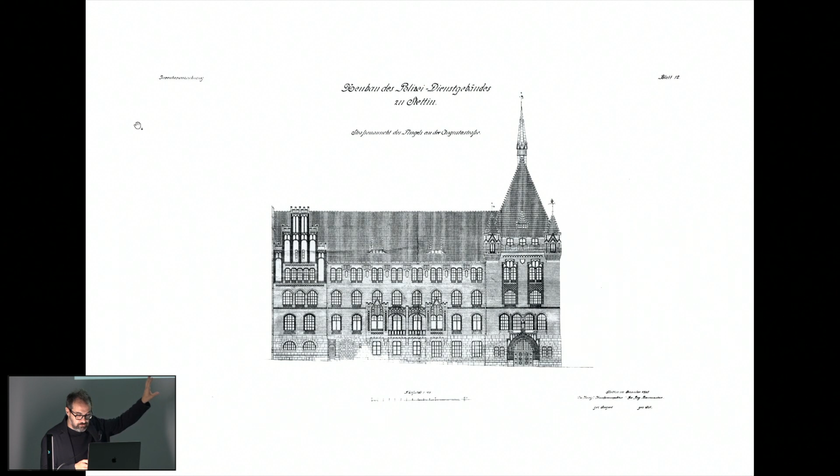In some way, what we like to do—the method or methodology we work with in many cases—is to work by analogies. We really like to work with what we have found, also by the circumstance or contingency of the different places. All these elements that already appear in this original architecture are passed through the filters of our personal obsessions, and are transformed and manipulated in a new project.

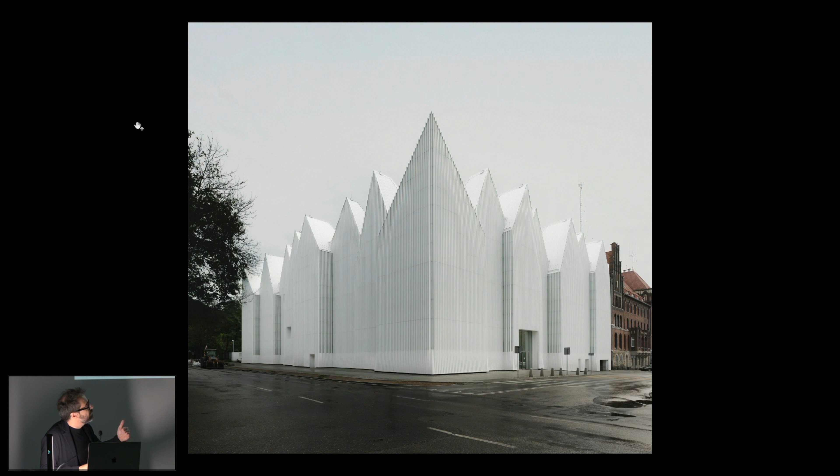This model of the Philharmony is made of the same ingredients that exist in some way in the context. We didn't have other elements, but we transformed what we found in a place. For us this is a way of explaining this idea of working in continuity with something. This is a building that wants to be part of a tradition that exists in this city. It still speaks about mass, verticality, roofs, pinnacles, the same elements that exist in the context, but filtered with another interpretation. All the elements that appear in this building are again here.

In order to give continuity to something, it is important that a gap exists in some way. Tradition doesn't move in a linear way, but it is necessary in order to make it continuous to create a gap, a new step in some way, an interpretation. This is what we have tried to do in this building.

A reality is not just a physical reality, but there are different realities in a place, and something maybe expressionist exists also in this building, relating it with a certain history of architecture that appears in that geography. But this relationship with tradition is not a nostalgic thing, not at all. We select, manipulate, and work with elements that we found, but without nostalgia. In fact we took certain elements and then modified in a very clear way the materiality of the new building.

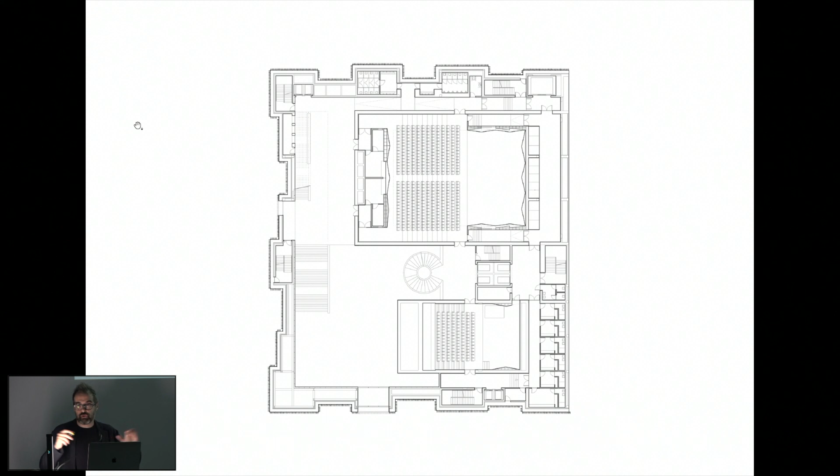We strived to solve the complexity of a program, of a context, in the most simple way. I think there is a moment in all projects in which just a few architectonic elements are able to solve the complexity, and this is the moment in which we found our way. The program of the Philharmony is solved by a crown that fulfills the site we have. This crown has all the technical elements, vertical connections, etc. It creates a kind of free space inside the building, which is really a new public space, and inside this crown float the two chambers - the symphonic hall and the hall for chamber music.

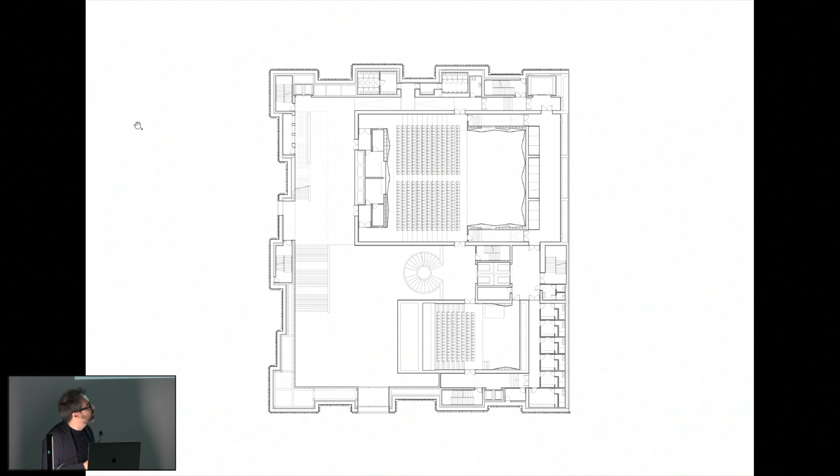I think all our projects started by reflecting on how to create public space. In many cases our architecture is just the frame of the public. In the other project I will present, you will understand this better. Here, in this project, we didn't have the opportunity to work with the urban space around the building. So what we tried was to manipulate the public area of the Philharmony - the foyer, the connections, the vertical connections - in order to create a kind of interior covered plaza.

In which you can host events and other activities. This space is a very simple space. It's just characterized by the vertical skylight that introduces light from the roof, the main connection that permits you to move around the entire building in a loop, and the verticality of the element. The rest is made in a very, very simple way.

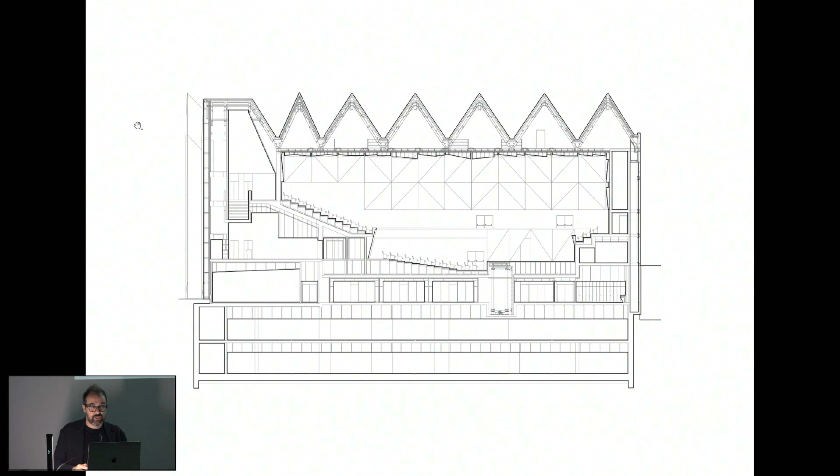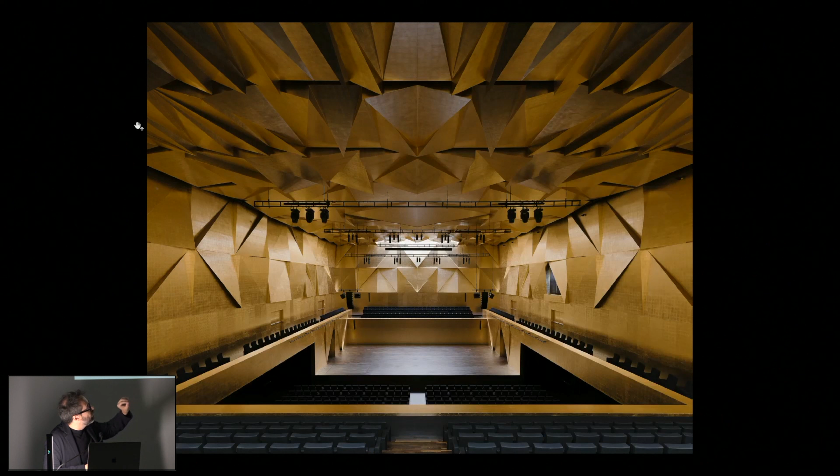What we thought is that probably starting with a detail, which is a very technical detail because it's made by different planes which are inclined in some way for very precise acoustical reasons. Starting with this element, we had the opportunity to build the entire symphonic hall. So the hall is a kind of ornamentation on a big scale, on a large scale.

This also alludes to or resonates with a certain tradition of historical concert halls from Eastern Europe. But what's interesting is that this large ornamentation, in reality, is a fantastic technical machine that permits achieving the best acoustics. And when an element which is ornament becomes a technical element, it's no more an ornament in some way, it's something different.

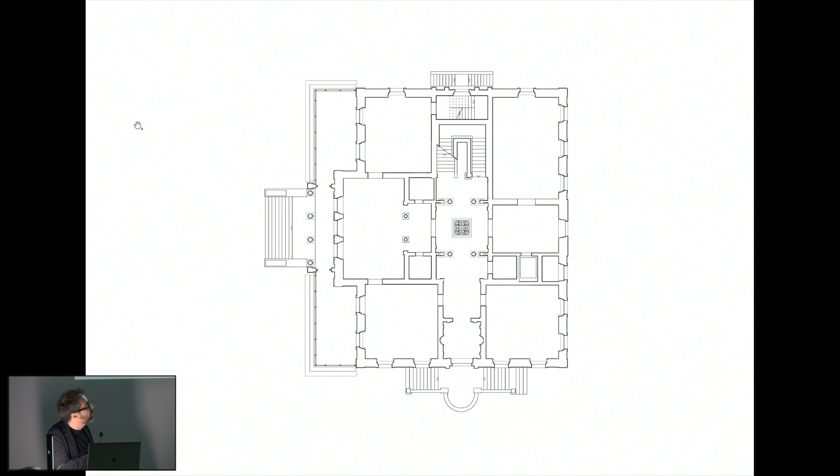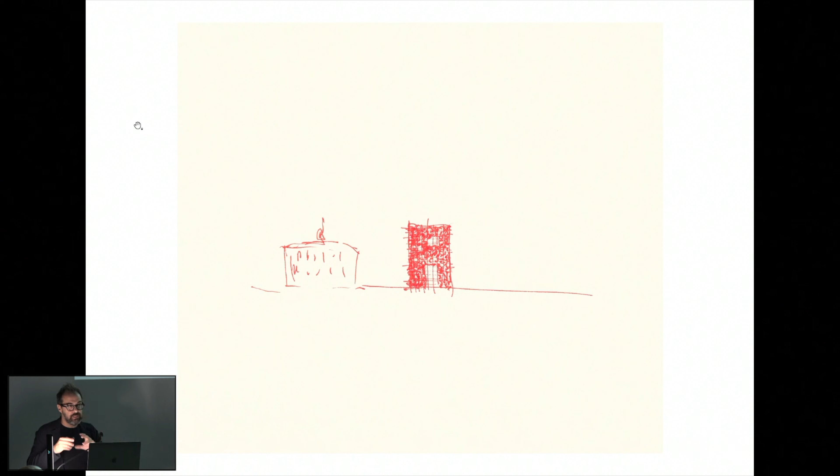When we started the project, this is the plan of the Villa Planta, the original building, clearly marked in a double symmetry. We started to think it was important to confront our proposal not only with this element, but with an ideal — the precedent of this building is La Rotonda by Palladio. So we started to understand the project as a diptych, reusing the same element of the pre-existing and transforming it into the new proposal.

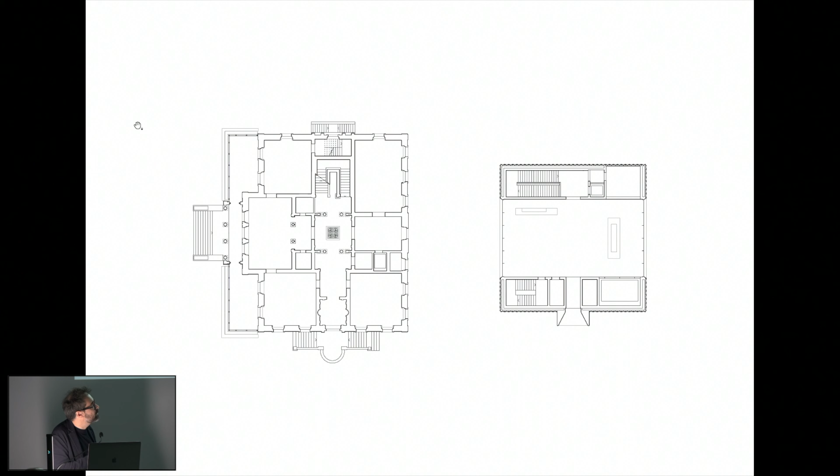What we've done is a very simple proposal. This extension works with the same element — a double symmetry. The geometry is extrapolated from the original. It's a very simple building composed of just two cores, one private and one public, containing a public space, this small foyer.

It's a neo-Palladian building with a kind of bas relief on the facade that resonates with the decoration of the historical building. It's an ambiguous element that works in continuity with what we had — very specific for this place, but at the same time very autonomous.

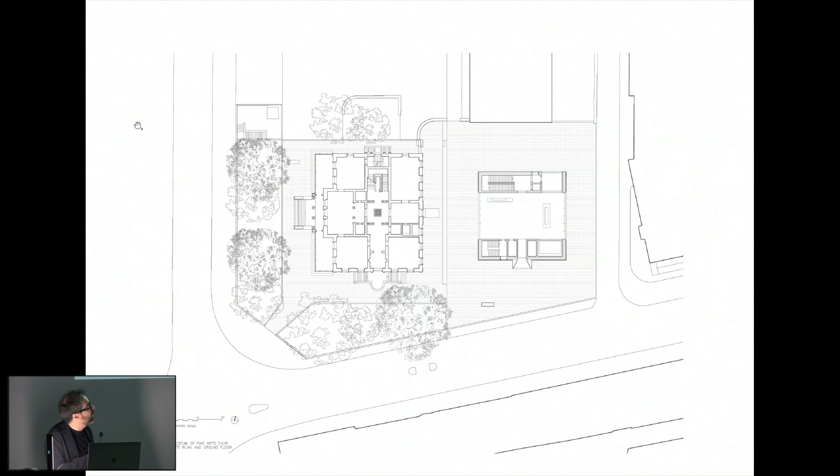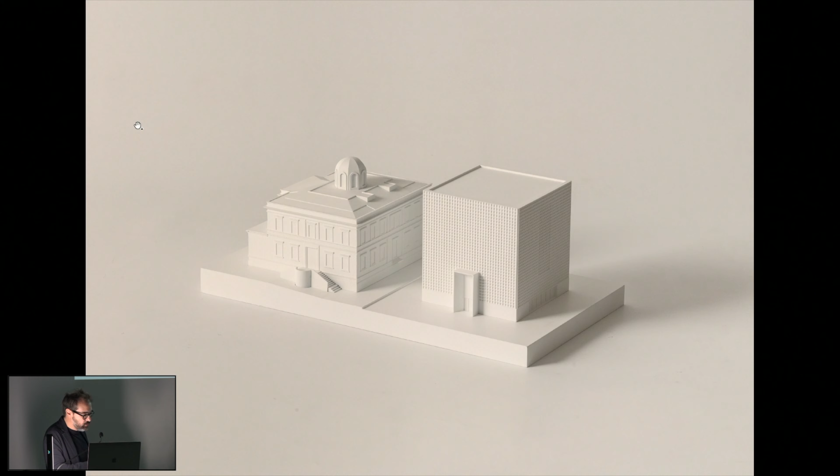What we've done to create this relationship between the two elements has been to reduce the footprint of the new building as much as possible, in order to have this kind of mineral garden or podium around the building, finding the perfect fit for the new building into the context. For us it was very important to understand that the two elements should create one precise unity. The space around here, which may not seem very important to you, has in reality been absolutely crucial for the project — it permits the building to breathe inside the context and have the right relationship with the historical building.

This may not be very evident here, unlike in other projects, but first we really try to organize the public space, and then the architecture is just the result of this strategy.

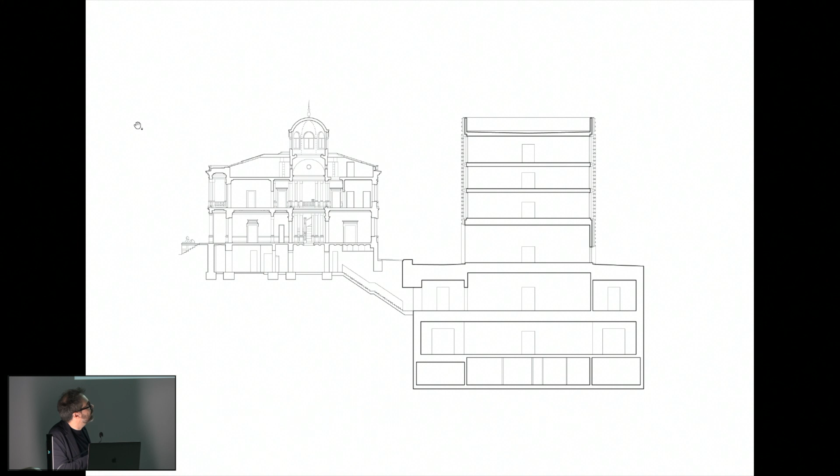In order to create this precise relationship with the historical building, we organized the program in a very radical way. We decided to put underground all the temporary gallery space, and keep above just the public space, then connect the building at the lower level, in the basement, without touching the historical building with any element. So the foyer declares the relationship with the historical building.

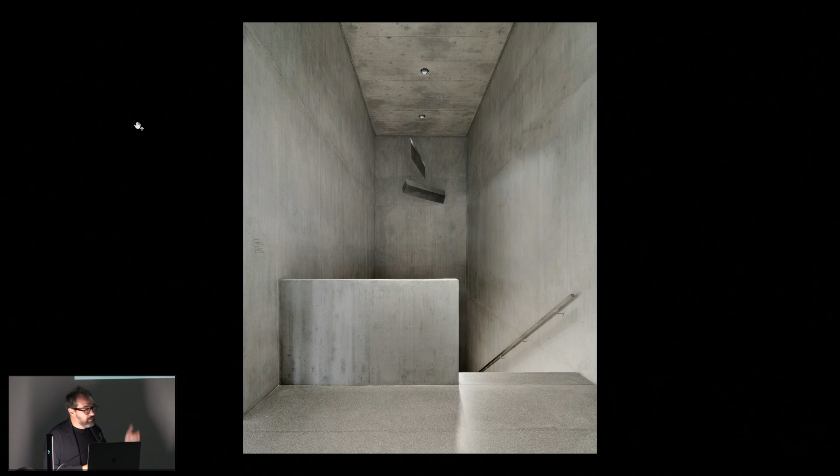From here there is a quite generous concrete stair that moves the visitor down. When you enter the gallery it's a very neutral space, but at level -1 you discover this Palladian influence very clearly. This plan, composed of a sequence of different, well-proportioned rooms, is exactly like a Palladian scheme in some way — a combinatory sequence of rooms.

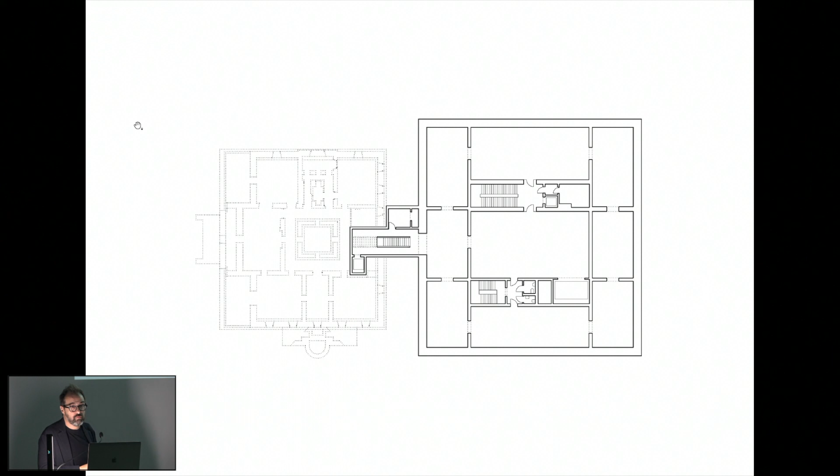The organization of this reminds us of the physical precedents here, but also of this ideal architecture in some way. So we are working in continuity with the physical reality, but also with the history of architecture.

The lower level shows this attempt we always make to reduce architecture to just what is necessary. We don't want to add any superfluous element. So here we have just the two cores and a wall that protects this space, and the rest is free space for temporary exhibitions that can be divided and modified as the curator wants.

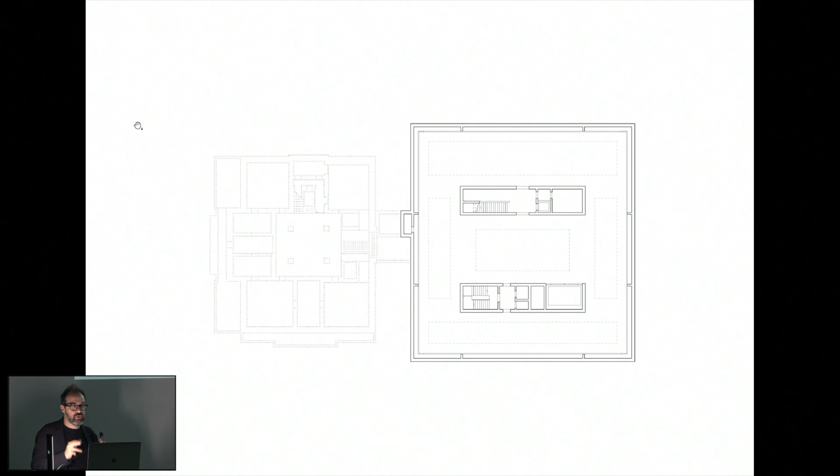As I said to the students before in my talk, I think we don't have a preferred material, but we understood the materiality of the projects as an element that can intensify an intimate relationship with the context, with the atmosphere of a place, with also the materiality of a place. So I think for this reason, every project has its own materiality in some way.

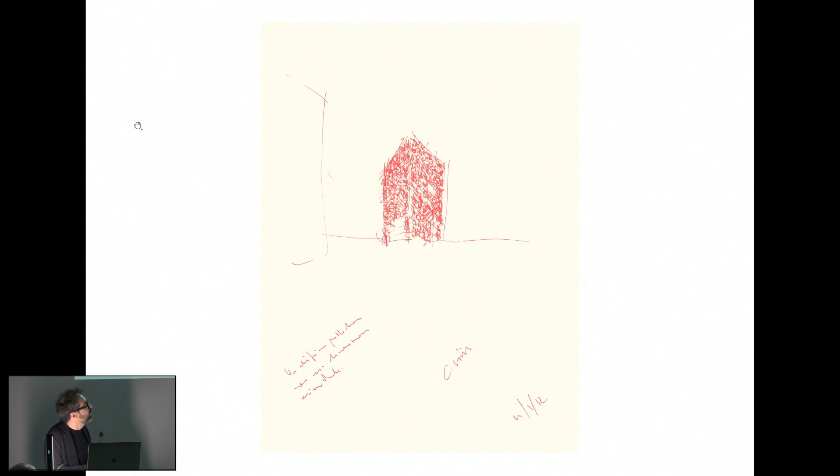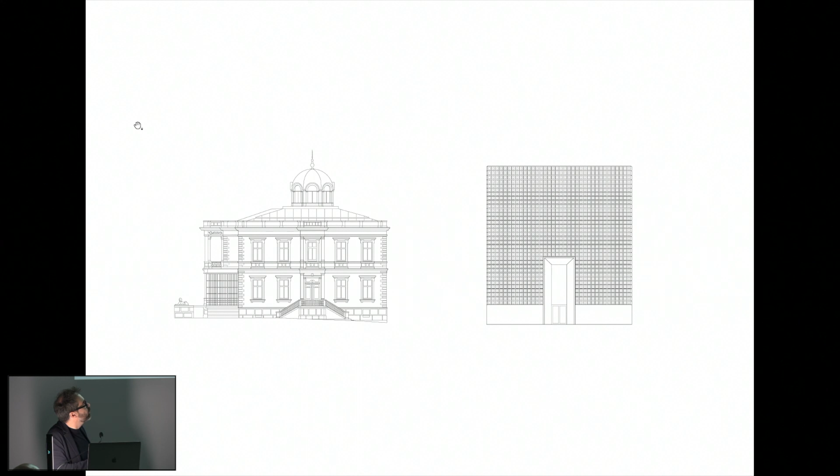In that case, the opportunity, or also we worked a lot with the facade of the building, because for us it was very important that this kind of filigrane or bas relief allude or resonate with the other ornamentation that exists inside of the historical building. And again, we worked with the specificity of this place. We were based here in Switzerland.

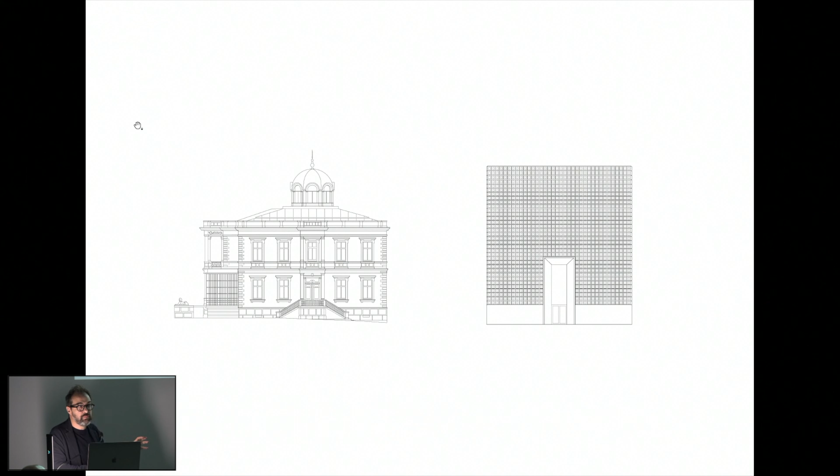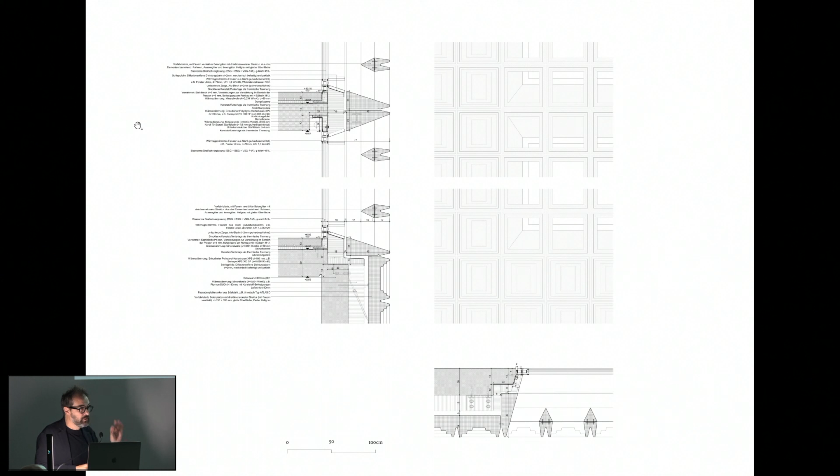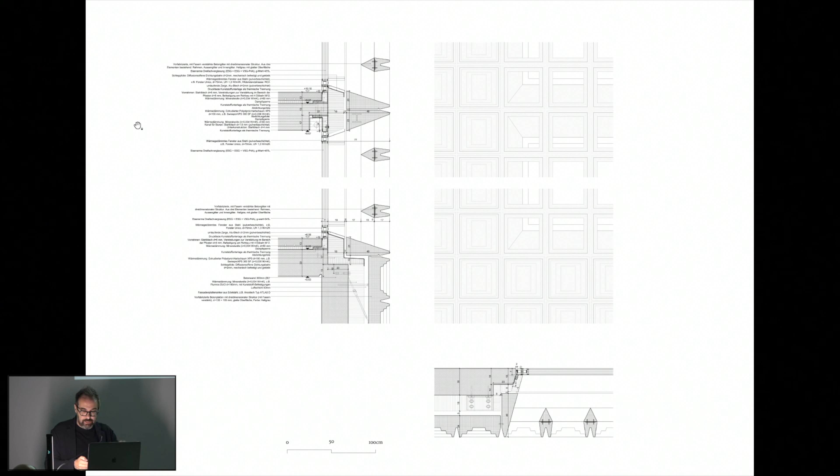They have a wonderful knowledge about how to work with concrete. So we were able to make the entire facade in prefab concrete with very big panels of concrete, in which we were able to have a very precise detail, less than 1 centimeter, in this element. But again, this element, every element of the project should have more meaning. This is not only a conceptual element, but it's also a very technical element that permits creating this filter from the light for the upper part, and also hiding all the technical elements.

Also, we continue to reinforce this idea of the detail also in the loading, the door for the loading dock, in which we carved the steel in the same way as the rest. There is a detail, but an important detail.

In order to reduce the footprint, what we proposed was also to use the foyer as a loading dock. And this is a kind of very radical decision because it's a way to find synergy between programs that apparently are completely opposite. But this also is an element that permits really then to liberate and create public space around the building.

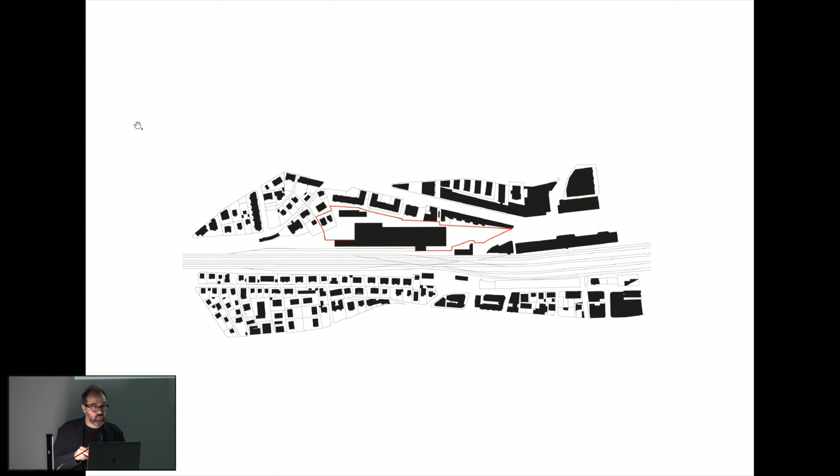So the project was about locating in this area not only the Fine Art Museum, but the three major museums of the city: the Museum of Design, Museum of Photography, and the Fine Art Museum. For many months, we really tried to see how to manipulate, reuse, transform all these historical elements. But at some point, when we looked at the diagram, there was the actual situation with the area fulfilled with this element. We started to think that for this project it wasn't enough to transform an element, but it was really important to define an urban strategy.

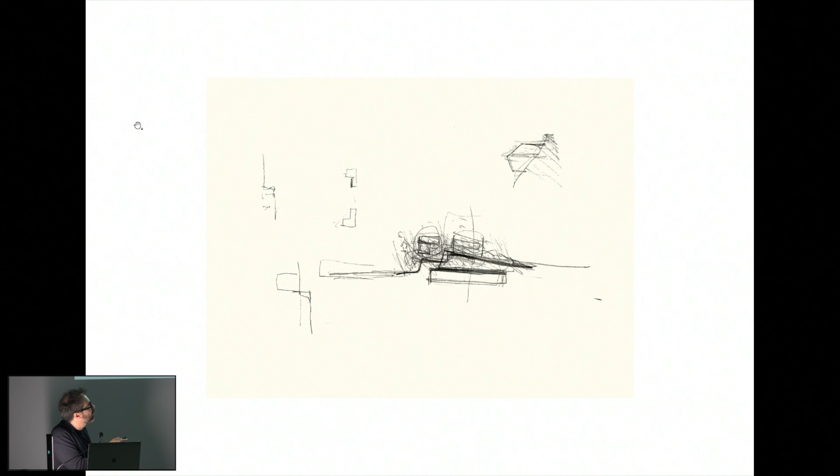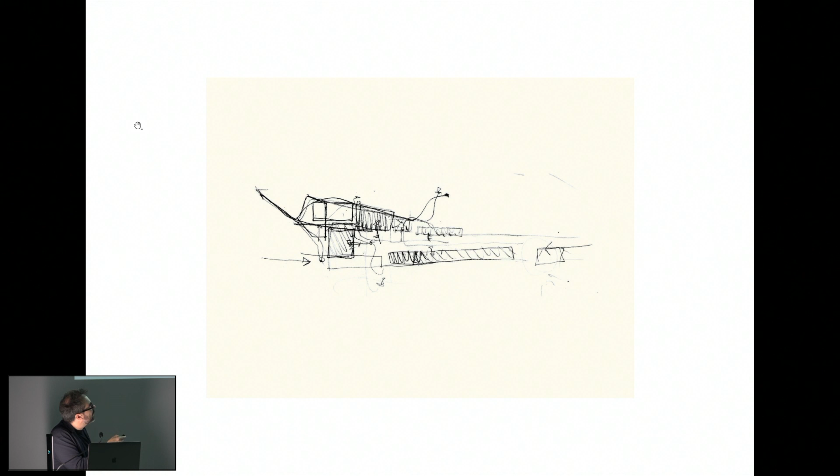This elongated esplanade could be linked with the plaza in front of the train station, and really organize the new quarter for art as a part of the city, and link this new quarter with the city.

And so we solved the project again in a very precise way. We just put the three elements. This is the Fine Art Museum and the other two museums. And at the core of the proposal, there is this long esplanade that links this area, which is actually a cul-de-sac, with the city center.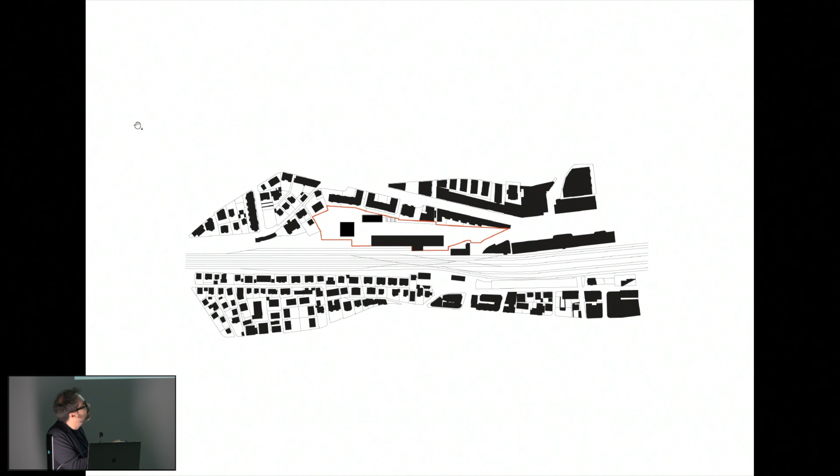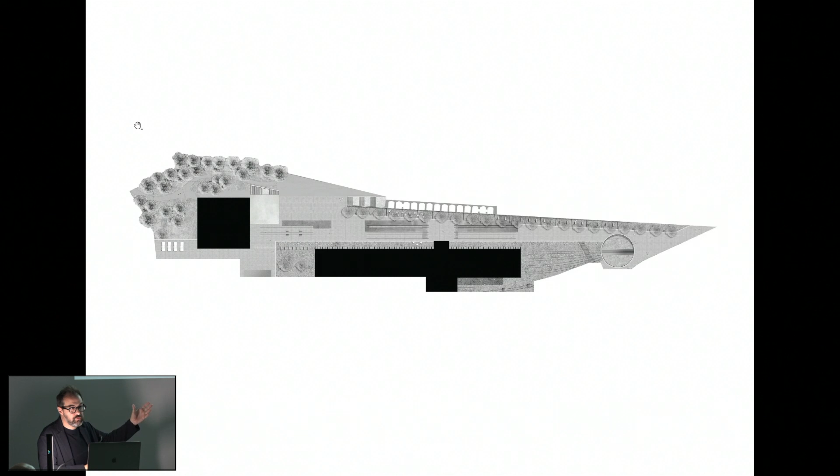In another step, a year later, during the construction and with a second competition, the two museums are being condensed into just one element, and this process of simplification of the place has been finalized. The core was the public space, and the building, the Fine Art Museum, arrived after this decision in a very easy way. We understood the museum as an elongated wall, as an inhabited wall, able to divide the new public space from the world of trains here.

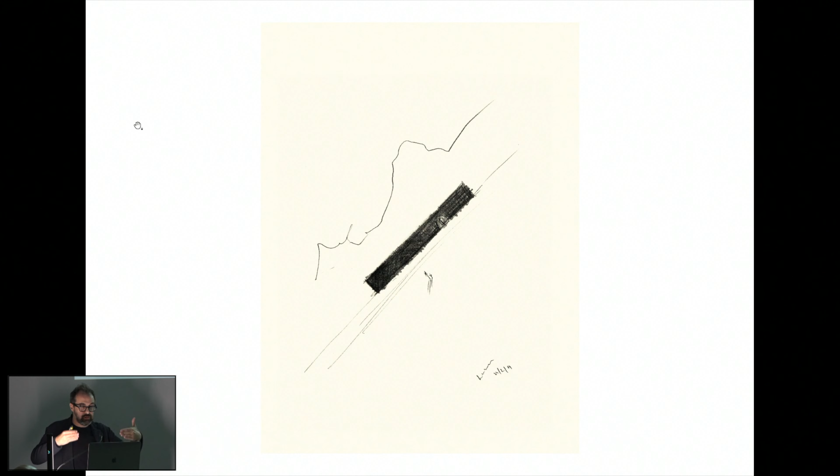So in these first sketches, you can notice how the building had just this wall that is confronted with the landscape of the mountain in the back. And the building, as I say, arrived very, very easily. Just this kind of sequence of elements that create this elongated wall, very porous and active towards the plaza on one side, and very opaque from the other part.

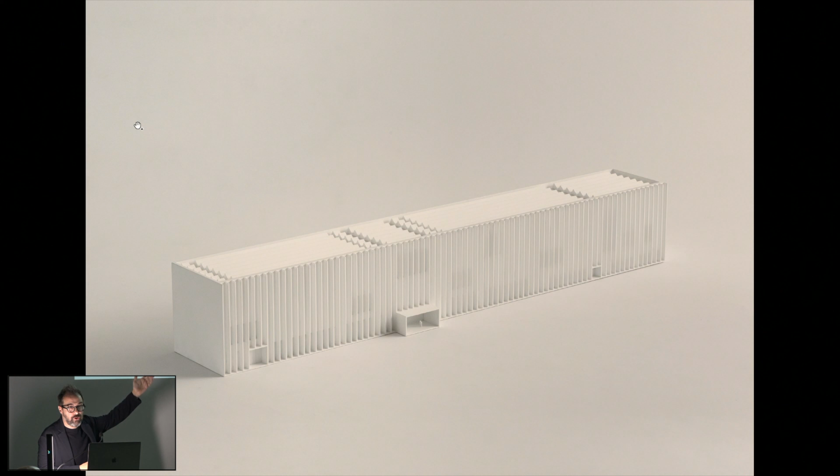But from the other part, you can notice also that the building starts to appear like an industrial element, like a big fabric in some way. And again, this was the attitude of the project: to be in line, in continuity with this kind of industrial atmosphere present in this area.

This area was essentially an artificial space platform in the middle of the city, very inclined, dedicated to maintenance, trains, etc. When you have the opportunity to make this kind of big urban transformation, you shouldn't lose the quality and character of this reality. So this is a building which resonates with the industrial condition present on this site, a building in the middle between contextualism and abstraction in some way.

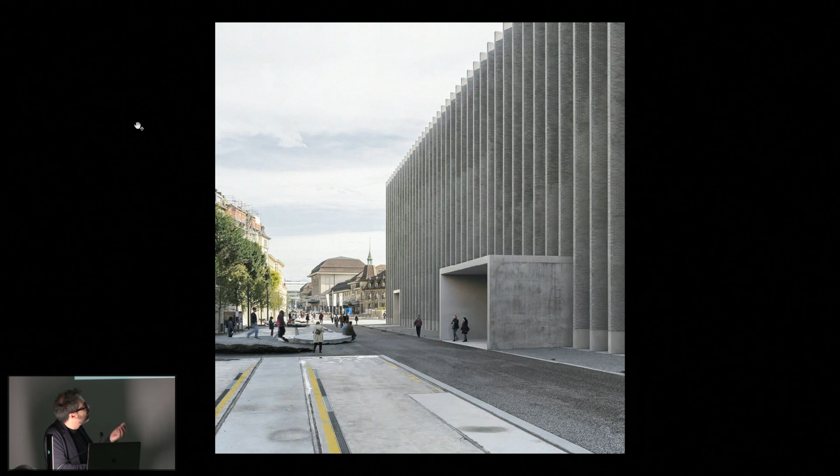From the other side, the preservation of the memory of the site passed to the preservation of the floors of the other building that conform the new public space. This building appears a little bit enigmatic - you can notice it's very closed, very opaque, very industrial, but the reality is that behind this vertical element, the facade is very open.

The ground floor, I think, is completely open in some way, and this permits understanding the interior of the building as an extension of the plaza inside the museum. So this small element is not a minor element but the crucial element, because it permits inserting the new foyer and starting the rhythm of the entire building.

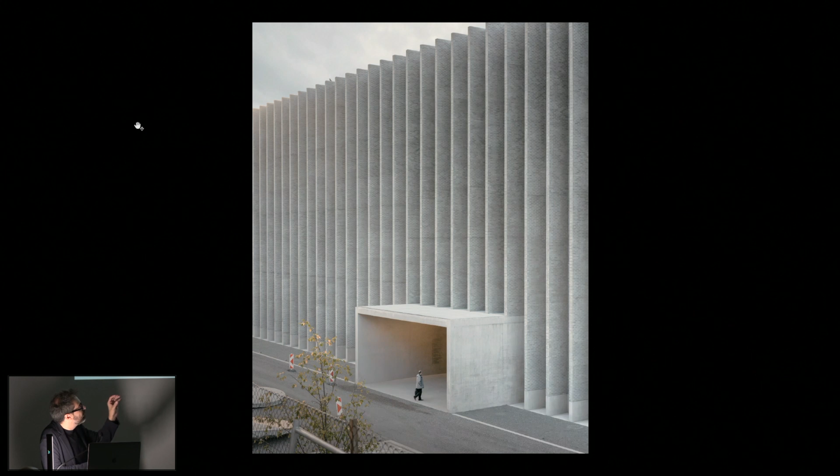We remark the entry into this sequence of vertical elements with this porch. When you enter here, you have to cross this compression, and then you arrive at the big foyer, illuminated with light from the roof, and the historical element. So the windows that I showed you before have been transformed into this new element.

Again, I think this is exactly a visual explanation of what I intend by working in continuity with a story, with our traditions. In order to perpetuate the tradition, it is necessary that there exists a gap in some way, an interstice. So this element really became the capital, the main compositive element of the new foyer.

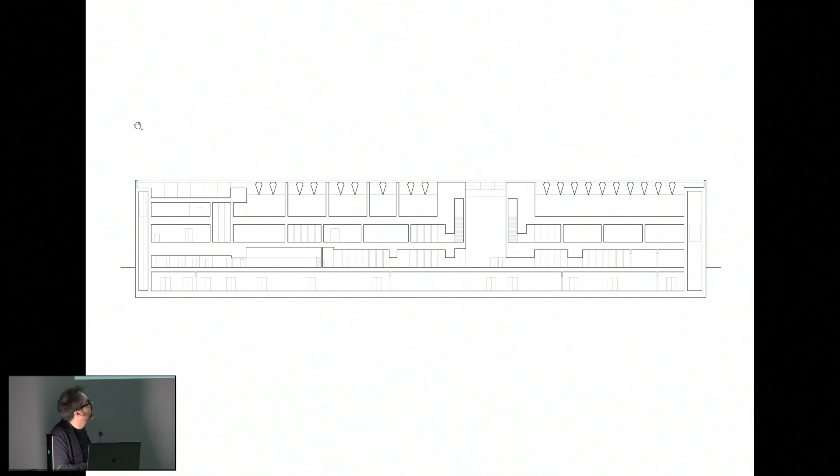Another view of this quite high space with the natural zenithal light. And then the building is very pragmatic: the foyer divides the building in two parts for temporary exhibition and permanent exhibition, and there is another cut in this small window that I showed you before.

Around the central foyer there are two stairs that bring you up, and this permits the building to be very flexible, because you can select where you want to move.

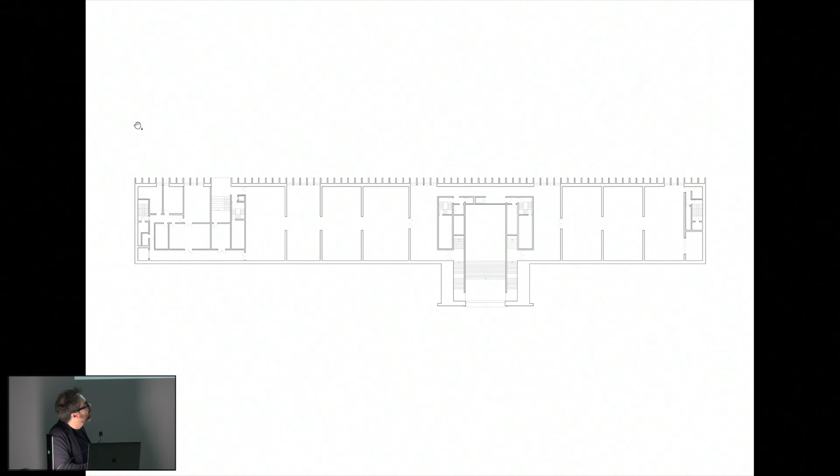This is the first floor, in which you start to understand the structure of the building. The public area has this kind of mineral materiality, and here you can start to see the function of this vertical line, which is essentially our brise soleil that filters the northern light into the building.

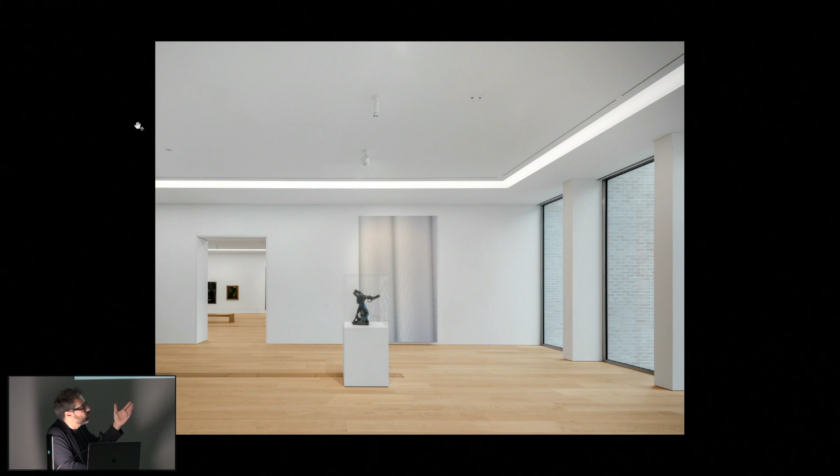Then you enter the gallery, in which we modified the materiality in order to permit presenting contemporary art, but also classical art. This is the reason why we worked with wood, and here you can see the windows on the right.

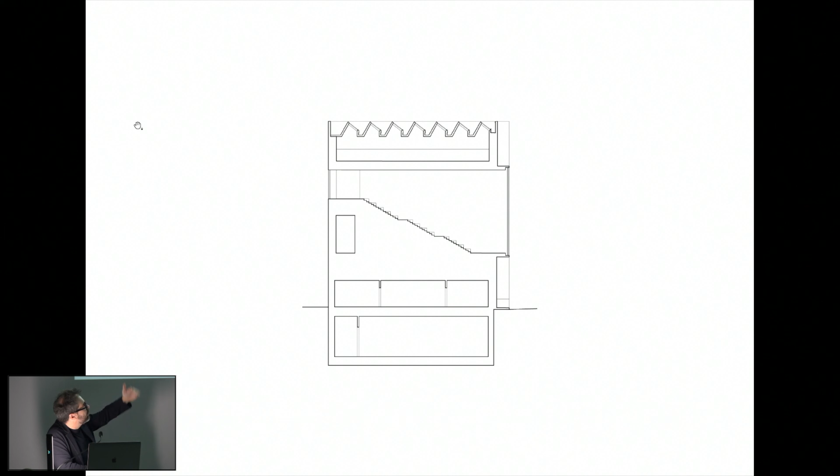On the other side there is another cut that permits establishing a relationship with the geography. This is the other element through which you can see outside. From one side, when you arrive here, you have a beautiful view towards the lake, and from the top you can see the new plaza of the Quartier of Art.

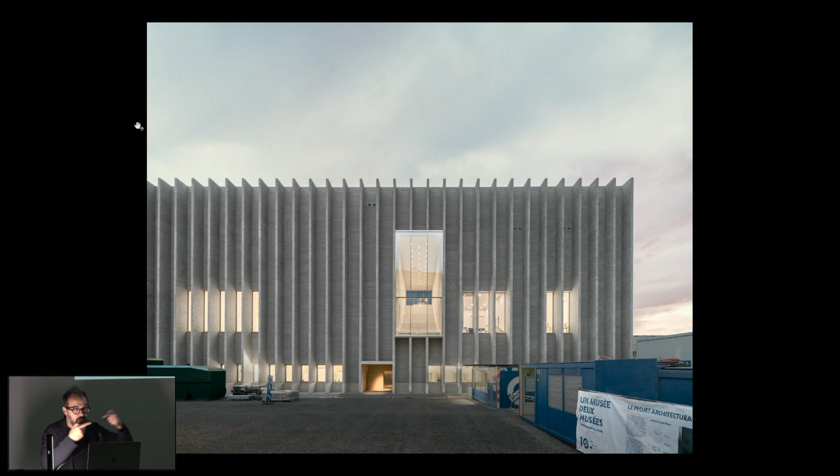This image was taken during the construction, so it's not finished. This element exactly is the only one that appears on the facade. The others are covered by this brise soleil, but this one, because it's a public element that establishes the relationship with the geography, is evident on the facade.

On the upper floor, again like in Chur, you can understand that this very big building is more than 150 meters long. It's solved with 5 cores that create the structure of the building but also divide the program.

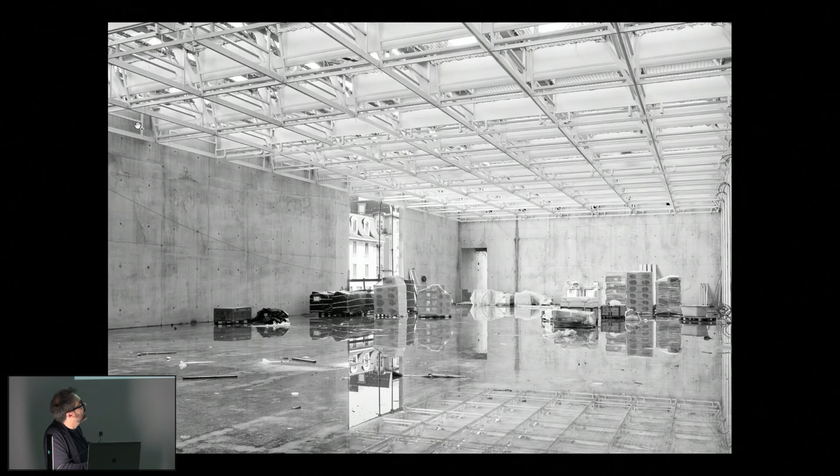The upper floor is characterized by the skylights, which create a main feature. This is a very sophisticated and technical element, but we have tried to solve it and present it in a very effortless way. It's like a ceiling floating above this huge exhibition gallery.

These are some other elements of this space. The entire building is made of brick in order to give this socle condition, and the windows are all in situ concrete, to give the project a kind of fabric condition, related to the other industrial buildings that were present on this site.

To conclude the presentation quickly, two recent projects we are doing now. One is the extension and transformation of a historical abbey in Belgium for a visual art museum. The place is located in Kortrijk, a small city very close to Lille, and this building is currently under construction.

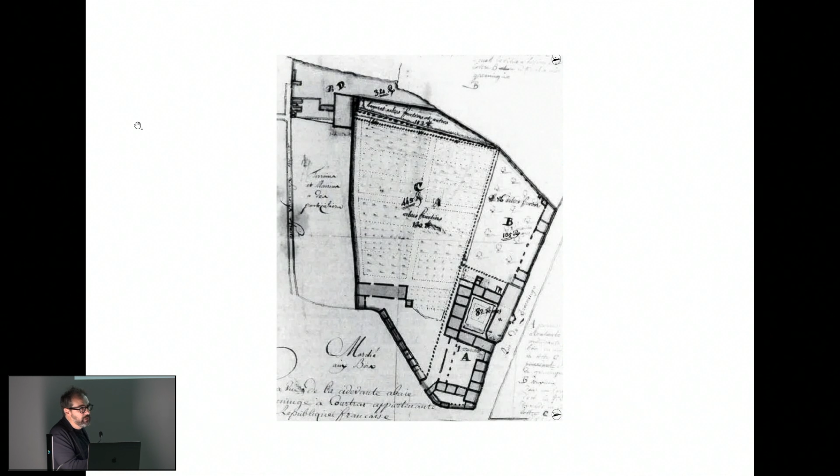In this historical map, you can notice the old abbey, where there was the chapel, and then the park of the abbey. This building suffered a lot of transformations over the period.

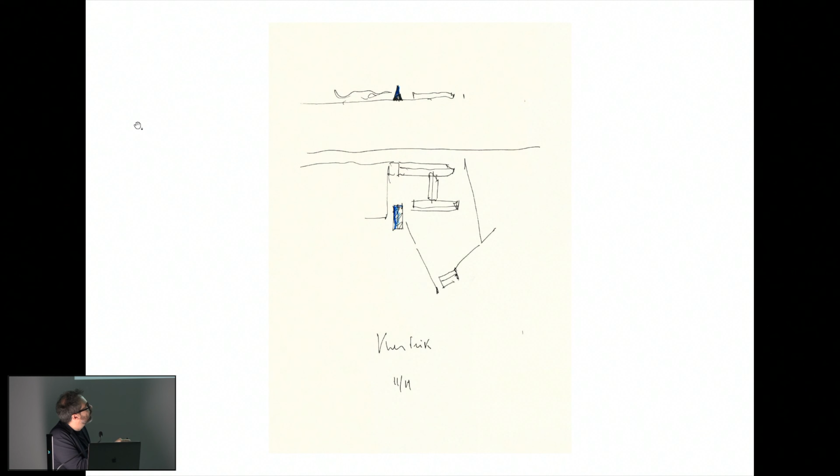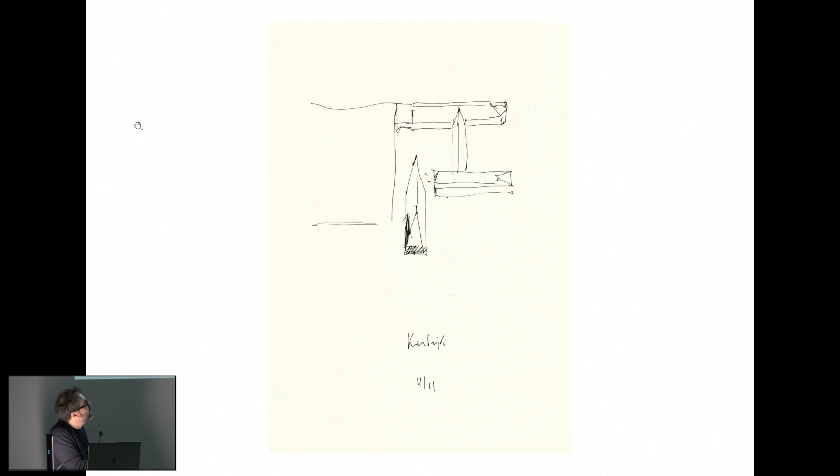We understood that the building grew with this sequence of elements: the historical chapel, another element from the 19th century, the dorms, and we just added another element, simple like that. We added a new element like those that already exist, trying to insert it in a very sensible and precise way.

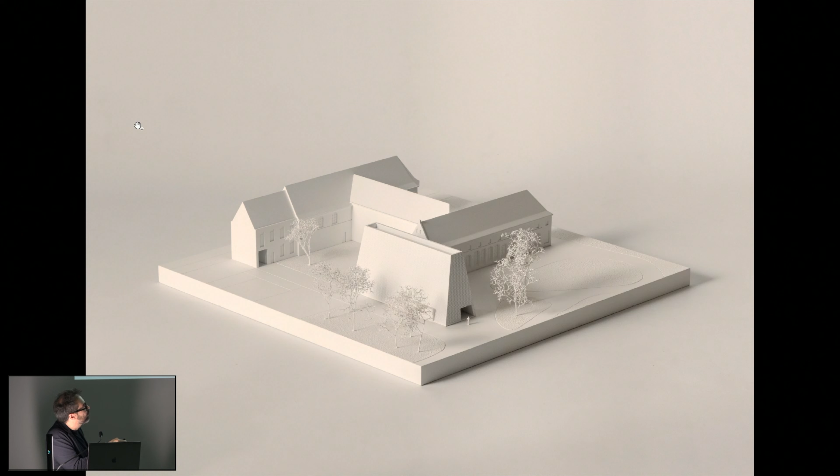This model shows the new pavilion, which is placed in this position because it ends the sequence of pavilions, reconforms the historical cloister that was destroyed in the 60s, and then can announce its presence in the middle of the park.

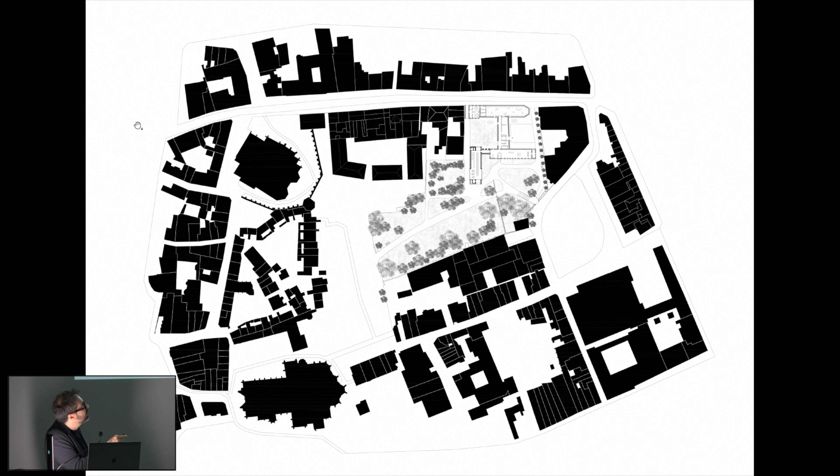In this plan you can see we placed exactly this element. But also, like in Chur, in order to activate and create a very sensitive relationship with the historical building, we have two galleries that run underground, under this courtyard and the other courtyard.

This is a view when you arrive from the park. This building is made of brick, a very dark gray brick, handmade, in order to try to have the same condition as the roof of the historical building.

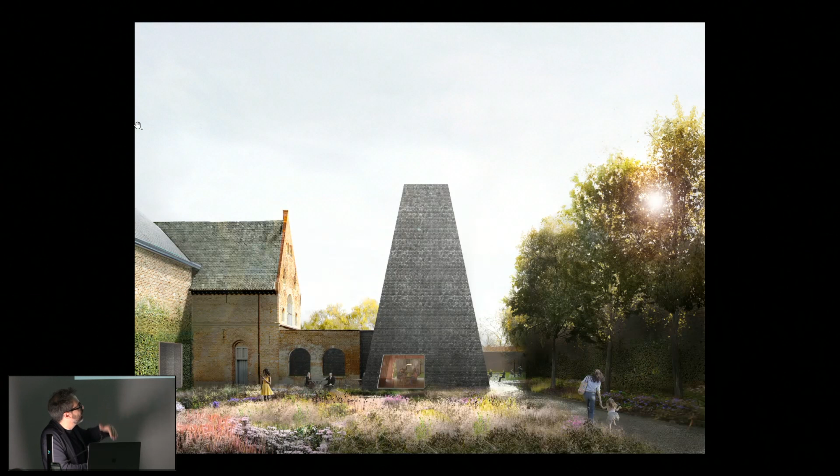The proposal is just a shell, in this case, that permits creating a kind of living space, a place for everything: for events, to present art, to have a bar, or whatever. So again, this element is a new pavilion that aspires to be in continuity with the historical one. And this is a view from the courtyard.

We had this space, and here we renovate the chapel, and here we just added one core in order to permit functioning. The interior, this is an image we prepared for the competition.

It's just a kind of, the idea was to create a city living. A city living is a little bit of a strange program. It's a place for everything, like a living room for the city.

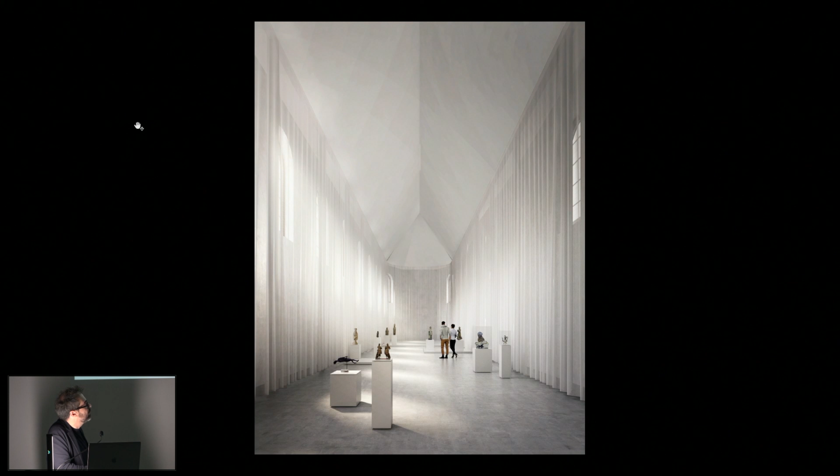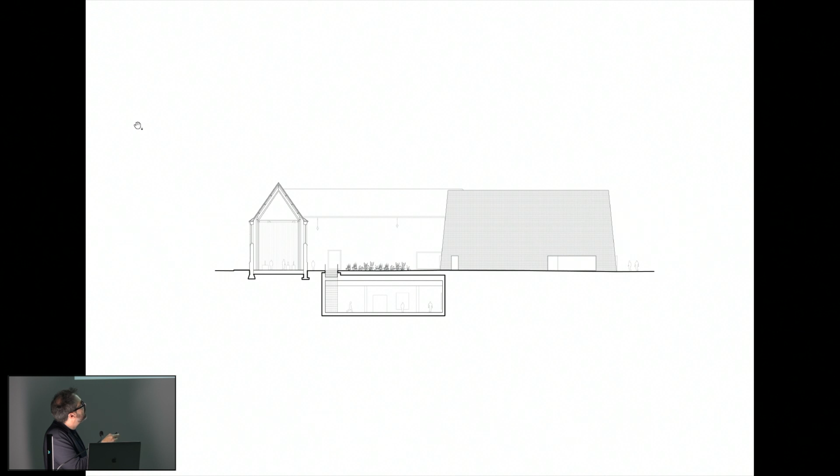And this is the chapel that has been transformed for the permanent gallery. The lower level, you discover the secret of the project. Again, the two galleries connected under the historical building, in order really to reduce the scale of the proposal. So here the three main spaces: the chapel, the new gallery, and the pavilion.

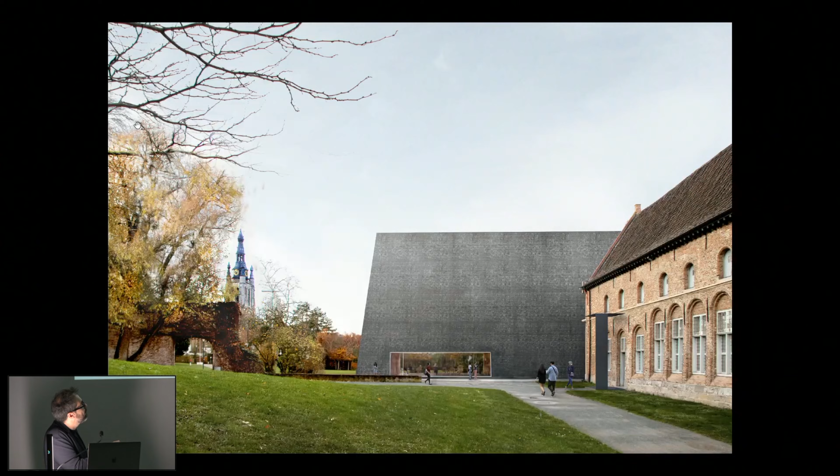This, I hope, will be our first building here in the US. After a very long selective process, we have been commissioned to create the new Oolite Arts in Miami. Oolite Arts is a non-profit foundation dedicated to supporting young artists.

Essentially, they try to give artists a studio or offer them classes, etc. Currently, they are located on Lincoln Road in Miami Beach, and they wanted to create their new headquarters, the new foundation, in a quarter in the north of Miami called Little River.

So this is an aerial view of the new site. The site is this one, very elongated, sitting along the train line. The train line moves here. So what you notice is that along the train, there is a very harsh environment, populated essentially by warehouses.

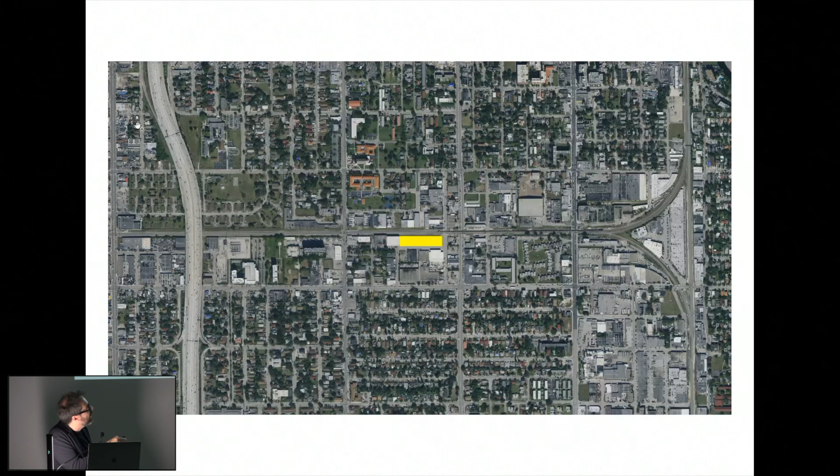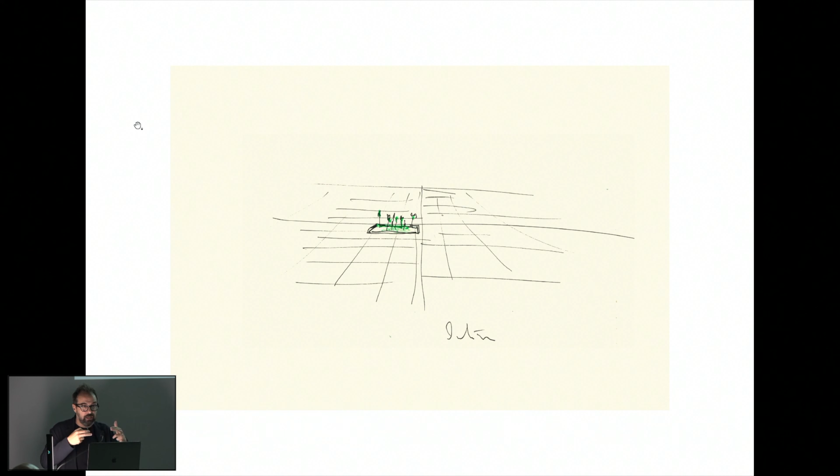So we started to explain to the client that it was important to have a building able to create a community. The foundation really wanted to create a community of artists, a sense of community between the artists and also the neighborhood. So working with an enclosed garden and vegetation, which is absolutely absent in this area, probably was a good strategy.

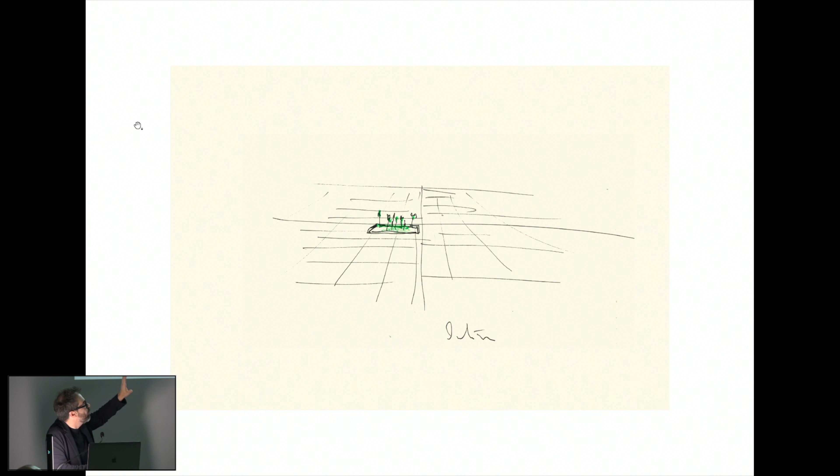These are very initial sketches, before knowing anything about the proposal. We started to understand that, because of the program - essentially spaces for artists, small ateliers for artists, a gallery, etc. - it could be organized as a collection of small rooms, each with its own character, where you can have the gallery or the theater, the gallery or the studios, etc.

And this collection of rooms could be organized along this kind of interior garden, taking advantage of the wonderful vegetation that Miami has. And these are other sketches.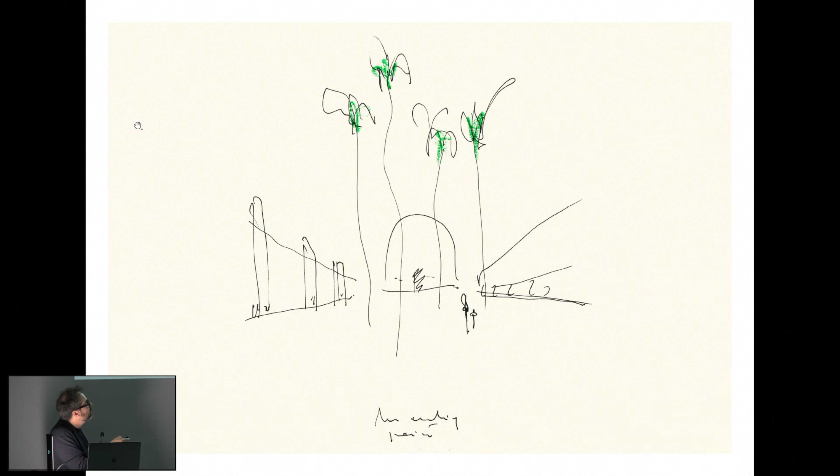So we started envisioning that something could happen on the two sides to create a kind of enclosed sense, with some vertical elements. These are other sketches we started to envision for that problem.

Because of the site, we can create a kind of promenade that permits entering the different studios and have a connection also with the street or with the train.

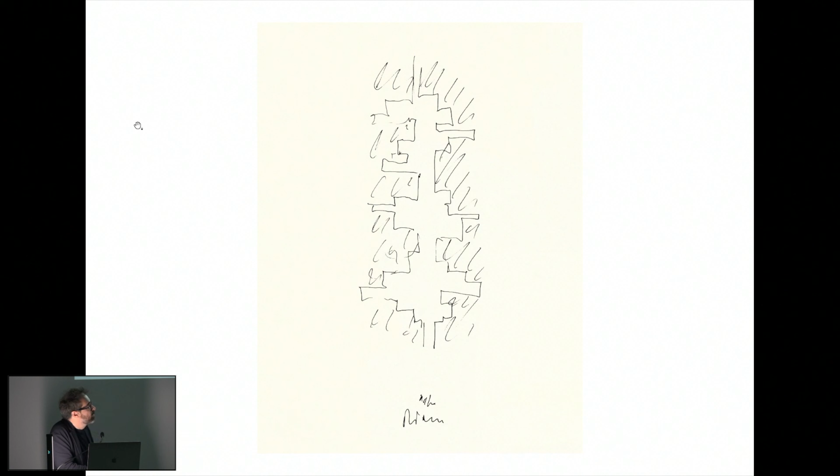We did all this sketching without knowing anything about the proposal, but there was a very precise and beautiful moment in which we realized that we could compose the project using just a cell, a very archetypal element. A studio for an artist is just a room with a skylight, or a window that brings northern light into the studio.

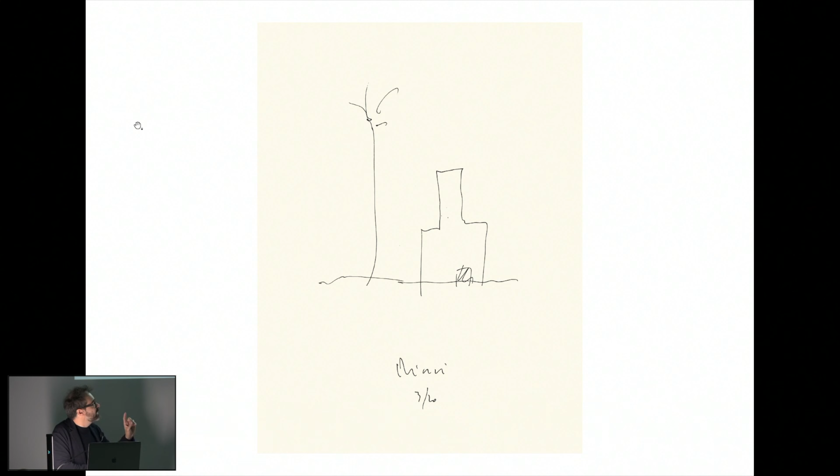This was a kind of epiphany for us, because instead of asking how we can confront our project with this new contextual condition, we decided: instead of creating an object, try to create a place. In this project it was much more important for us to create a place, a context which was felt, than an object. So we started envisioning that by adding this very basic, simple element, we could create a landscape, an artificial landscape.

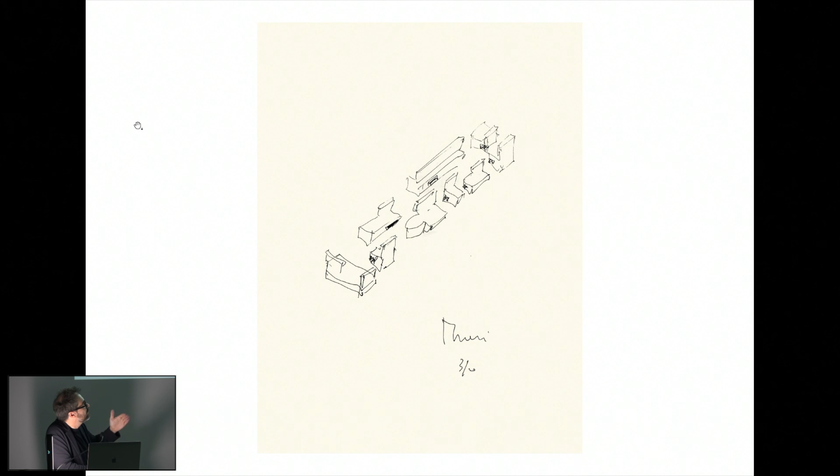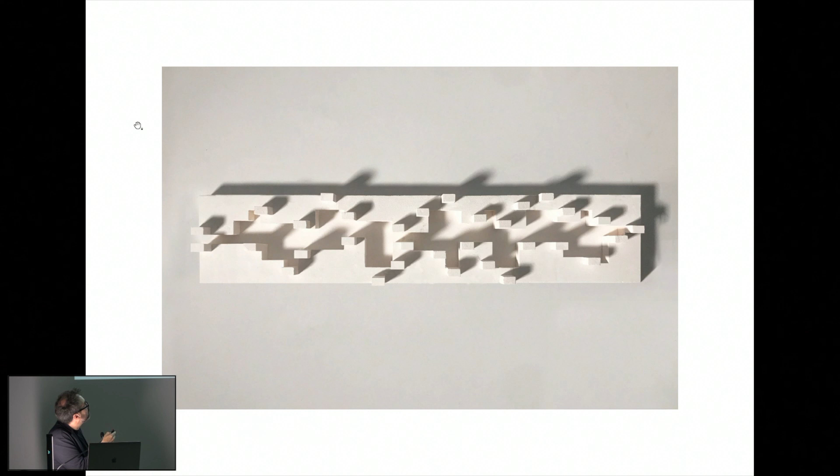So we started to make tests, reorganizing it with all the functions, and this was the first study model we did, in which you can notice there is a plinth, this kind of enclosure that contains all the elements, and a sequence of small towers that were skylights in some way. We understood that starting with this cell, the studio of the artist, composed of a skylight and a window relating the studio to the garden, this public garden inside the building, we were able to regularize and dispose it elongated along this path.

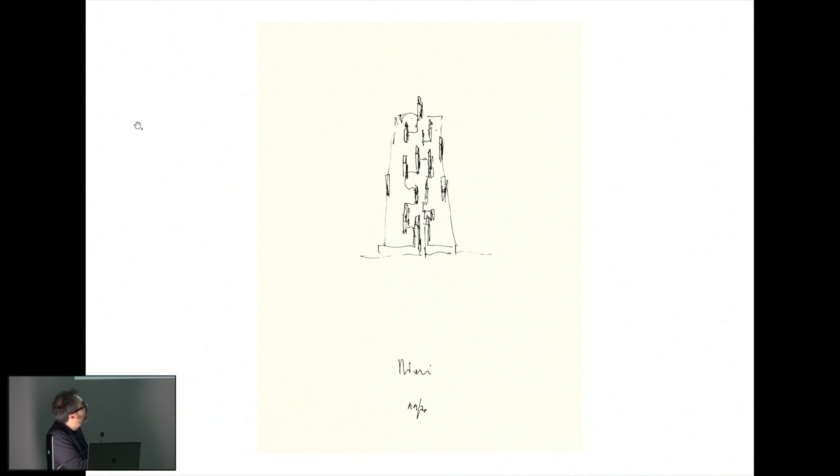We were able to create an artificial landscape, a context in some way, a context that doesn't exist there.

And suddenly, again, all our projects are a reflection about public space. This is really about creating a public space inside the building, because this garden will be public, to create a sense of intimacy and community for the artists, but at the same time is very permeable from all the other sides. And it is an element that can probably resist when other buildings are built around it.

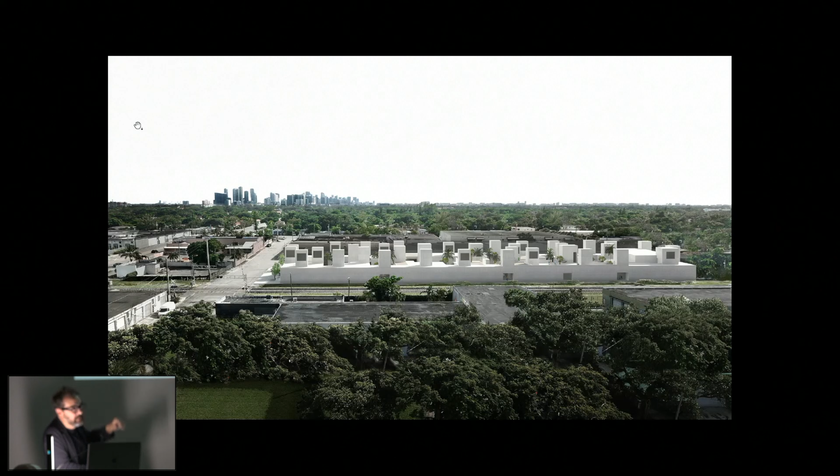So at the very end, the building appears like a village for artists, a small village, and it works by analogy with the downtown. It's a kind of downtown at a small scale. It's a little bit an enigmatic building - you don't know exactly what's happening inside. You have the feeling you want to enter through the doors and discover what's happening there. Really, it's about creating a place more than an object.

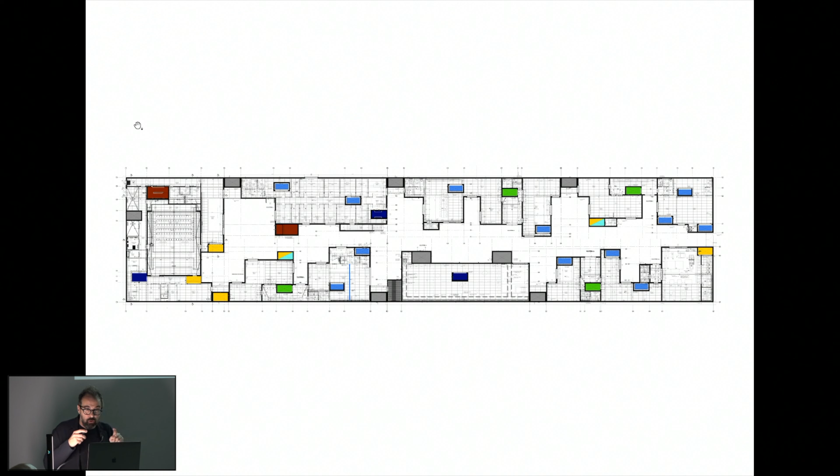So some elements remained as skylights, some became wind catchers, some became solar chimneys, and some became water tanks. All these towers create this sophisticated bioclimatic system that permits using less air conditioning inside the spaces. The important thing is that this element is not just a formal element, but a very technical one. So the architectural vocabulary is linked with very precise technical functions.

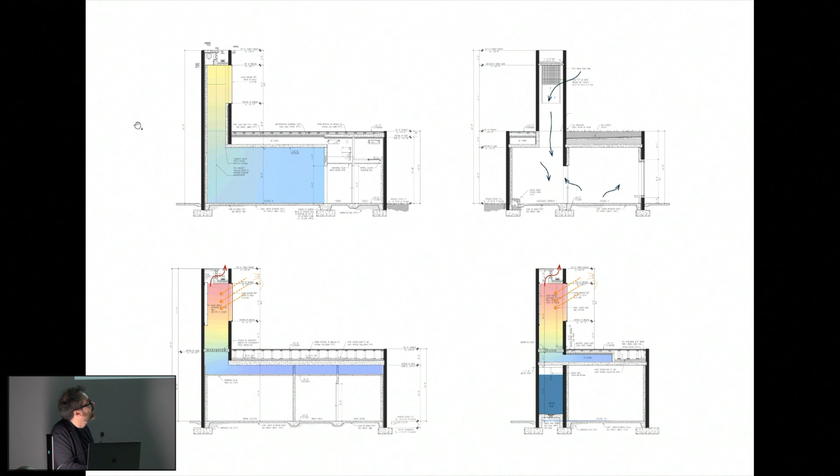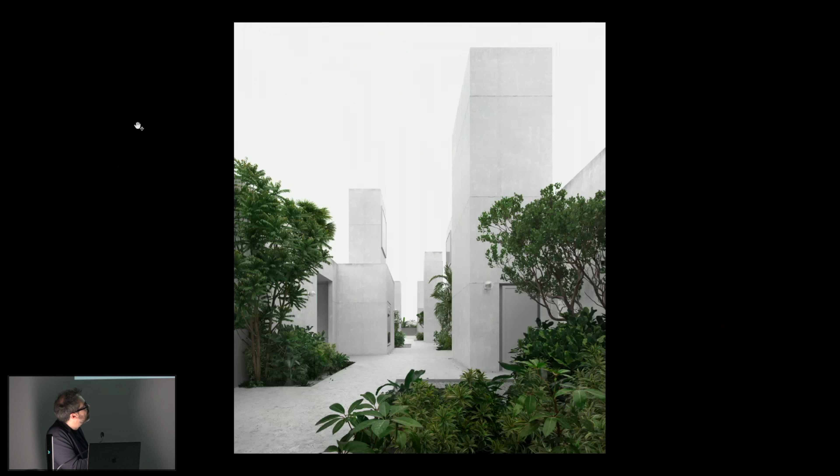Everything is solved in just one floor with different clusters. You can enter the cluster through this kind of patio and then move into the studio. There's the gallery, theater, etc. So this is the main entry when you arrive into the light, and the idea is that when you enter, you discover a kind of new place, a new microcosm.

We imagine there will be very exuberant vegetation that will also help refresh the space. You can enter through this enclosed garden into the studio. The artist will have, it's really a kind of small town in some way, our small village. It's an effort to create a place, a destination, more than architecture.

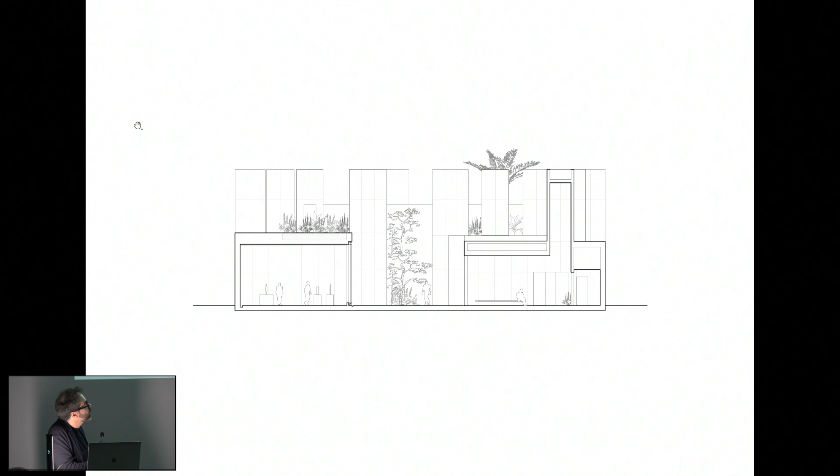Some sections through the enclosed patio, which is exterior - this is a porch essentially, in which the vegetation enters, and you have to enter into the studios through it. The section through the studio is always characterized by the window and the skylight.

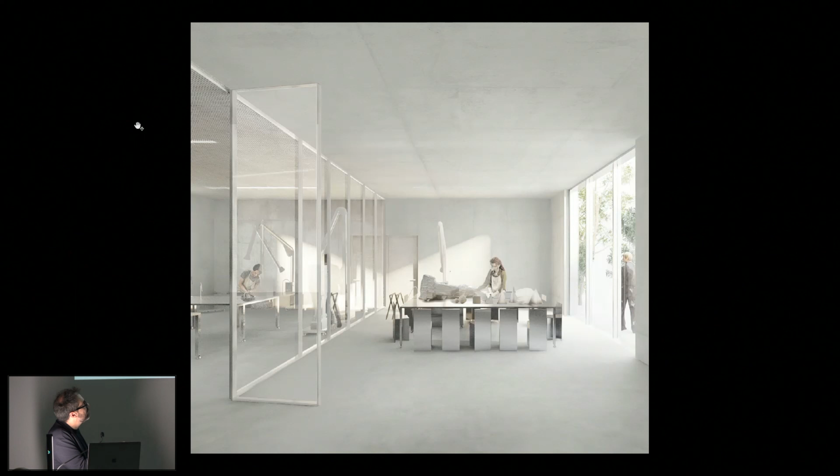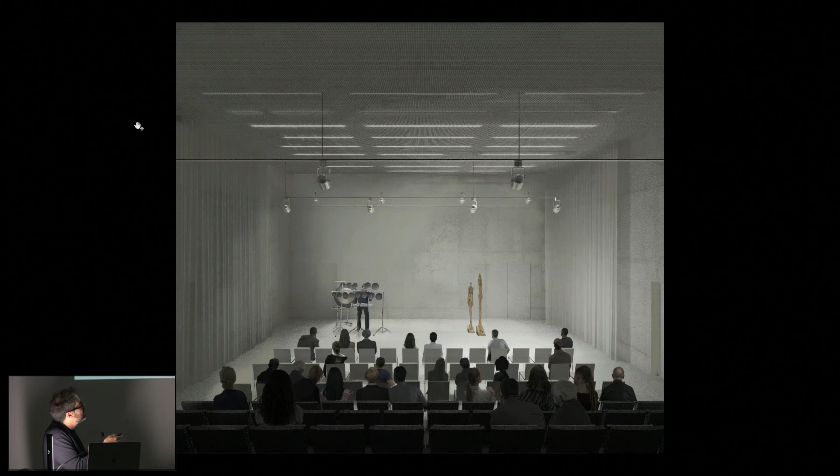The main gallery in which the artists present their work, and the public spaces have these kind of huge windows in order to blend the garden with the interior spaces. The carpentry is outside, so it's not visible from the inside, and there are some other spaces, the creative spaces and the auditorium at the end.

The artists used to work during the night. They can have the key and enter whenever they want. So every time you see one light appear, you know there is an artist in there. Our work is based on that, as we only work and we really force ourselves to be specific for the place and try to highlight the diversity of the different spaces.